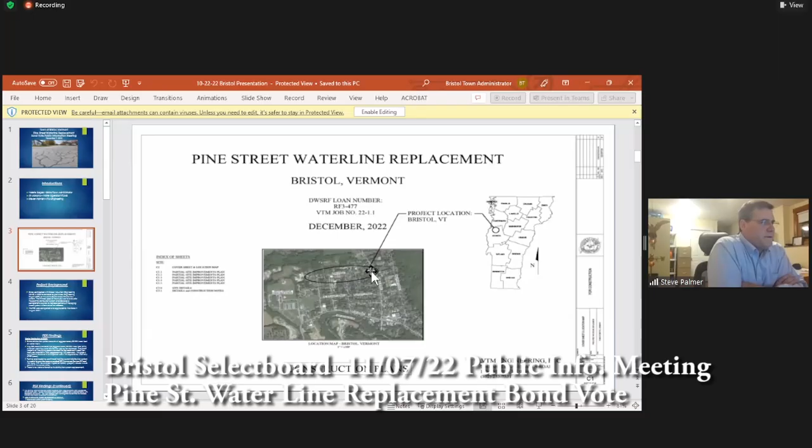GME did the preliminary engineering report. It was a pretty in-depth report, one of those things you definitely want to read at night just before bed, but there's a lot of good information in there. It didn't just cover Pine Street, it covered your entire distribution system. It was really a plan for you folks as a town on what needed to be done in terms of infrastructure maintenance and how you're going to get there. So for folks that are interested in that kind of stuff, it's really a good thing to understand.

So the basic findings out of this, as we were talking about, you've got a little over 10 miles of line here. Green Mountain Engineering recommended that you replace about 33,000 lineal feet. The great majority of that, 95%, is stuff that was put in 1905. There were a couple of small pieces added that were a little bit newer, but they were primarily for upsizing. The existing line is too small, and in the hydraulic analysis, they did a computer model to try to make sure we could achieve the desired fire flows everywhere. So there were a couple of small sections of line that they suggested, based on the computer modeling, to upsize from what's there today. The lines we're talking about replacing in the next 7 or 8 or 10 years are all 1905 lines. That really was the priority.

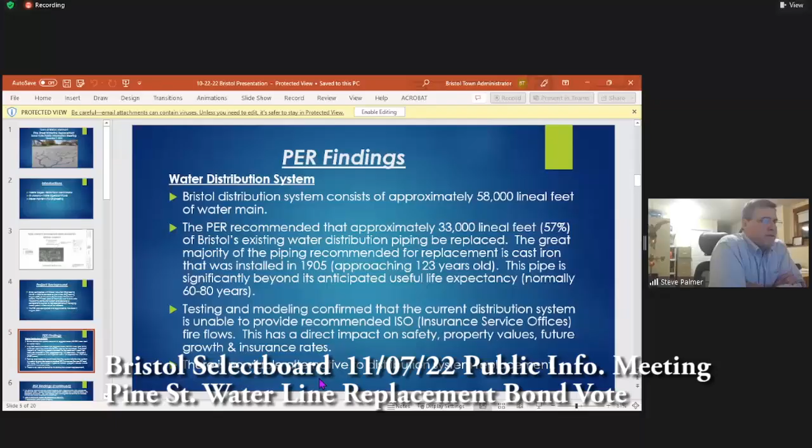This is a really important point. You got to realize in 1905 when they put this in, this was state of the art. This was put in with what we call bell joints - you've all seen it, one pipe slips inside the other. You've got a bell end on the pipe, and the other one's just a little bit larger, and it slips inside. Back then, they didn't have great materials like we have today with rubber gaskets and things that last hundreds of years. They would pack in basically straw, called oakum. They'd put the two pipes together, pack straw in that annular space, and then pour lead in between to seal it. That's essentially the sealer. And you can imagine, over the course of - we're getting up toward 120 years now - a lot of those joints have probably cracked and moved, and you're seeing significant leakage within your system.

Jill can talk a little more about the leakage rates, but I think the last time we looked at this, we were at about 55% leakage rate. That basically means that's the difference between what you bill your users and what your master meter today says went through your system. So it's quite extensive. Normally, according to the American Water Works Association, the typical municipal system would be about 16% leakage rate. So you guys are pretty high, but that would be expected with this old of a system.

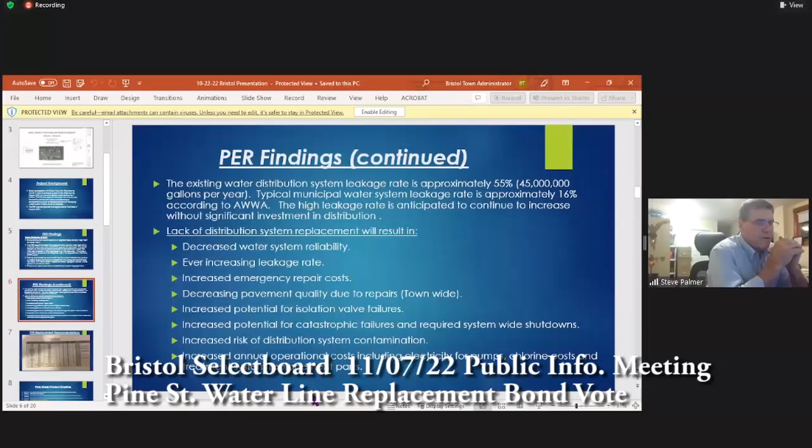That's where we're getting an increased potential for catastrophic failures. There's increased risk of distribution system contamination, increased annual operating costs, including electricity for pumps, chlorine, treatment system replacement parts. Everything's working a lot harder than it needs to.

Okay, next slide. Okay, Pine Street. So really, instead of going through each one of those, the bottom line is the project as proposed will be bid over the winter and constructed in the summer of 23, by the way.

Preliminary engineering report - here's a page out of Green Mountain Engineering's report. You can see all of the segments that they recommended replacing. Pine Street - Valerie's circling Pine Street. So those three segments of Pine Street are really what we're proposing today. It's about 2,600 feet of line.

Yeah, we kind of went through that already. Next slide, please. Okay, Jill, are you ready?

I am ready. So what you are looking at is a person that's going to have a heart attack. Just kidding. That is what the inside of a person's veins and arteries would look like if they were getting close to not having nearly enough blood flow, not enough oxygen, and they're going to have a heart attack. This is called tuberculation, and this is what is in the inside of these cast iron water mains - years and years and years of mineral buildup.

So now instead of having that whole 4 inches or 6 inches on all these 1905s, I think they're pretty much just 4 and 6 inch lines, we have maybe 2.5 inches, 3 inches in some spots, kind of a star-shaped pattern for the water to go through. So we don't have nearly the water flow that we would have. It starts constricting the ability to have the quantity of water going where you want for fire flows. And you can imagine valves that are seated into these water lines, sitting right in line, are going to fill up with the same material and not be able to go up and down anymore. So they're up and open, but when it's time to close them, you can't get a valve to seat its way down when the circle is no longer open.

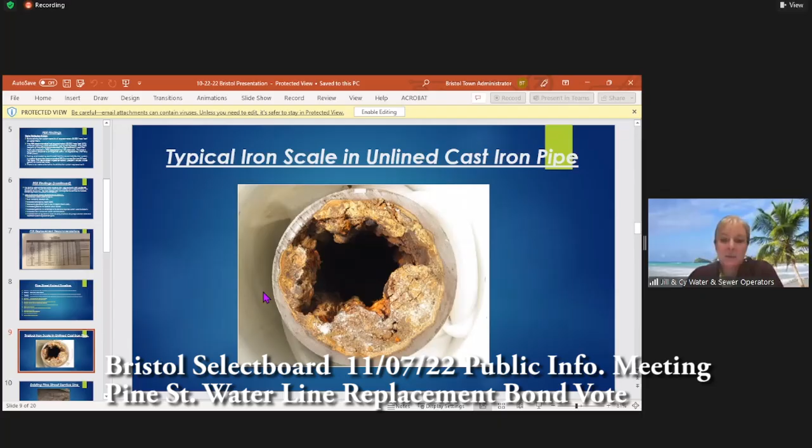So that is what we're dealing with, more than half of the system like this. I'm kind of excited to hear that it's 2,600 feet out of 33,000, because to me it's like, we're like 8 or 9%. So that's kind of exciting.

This is an existing, we call it a customer service, but a street service. Actually this is the town side, because that's the corporation - that's why they're calling it a street service line. That's the cast iron water main, right on Pine Street. And that is what it looks like when the water decides it's going to bust right through the service line just after the corporation. That leak right there, that size hole, will give you anywhere from like a 3 to a 5 gallon a minute leak.

Imagine if there's 100 of those in town. Take that times 1,440 minutes in a day, and that is why we are losing half the water that we're making - the joints, etc.

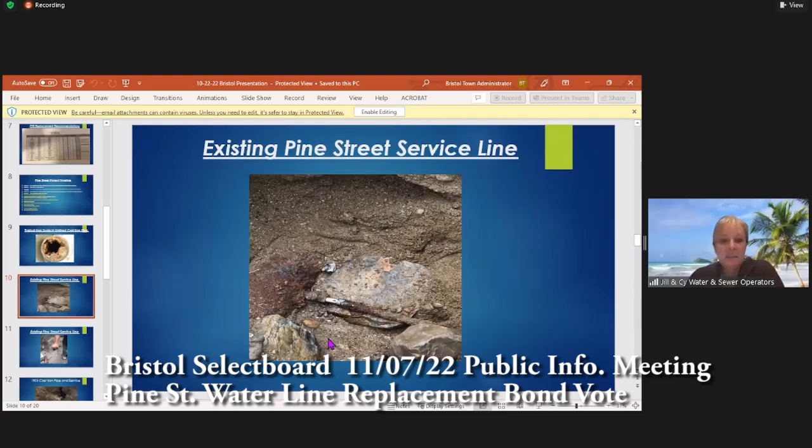Jill, that might be a good lead-in to talk about the service lines and the fact that we're at least going up to the curb stops with the replacement. That's awesome. Yeah, so under the road, we're at least going to the curbs. As far as what we call the customer side, leaving the curb, I believe that's still up to the individual customers. The nice thing is that while they're down there digging, at least the customers can see what they have.

And I can tell you, as the water operator, Cyrus and I are going to be paying attention to what we see and logging it down. So what that means to the average homeowner is basically what the town's going to replace is from that main water line under the street out to the edge of right of way and the side of their yard, if you will.

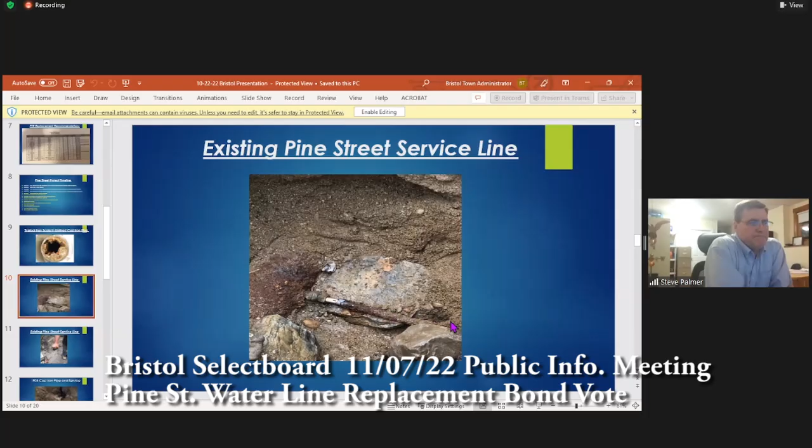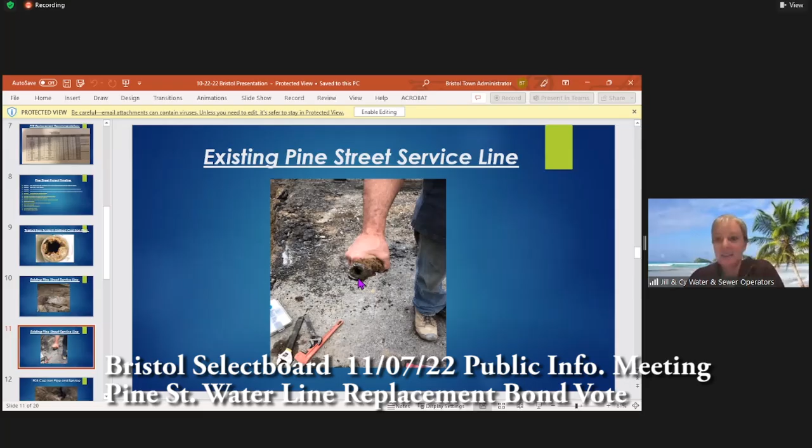Perfect, and that's just what it looks like. We're actually in the midst of replacing a customer service line today and tomorrow, and that is exactly what her service line looks like on West Pleasant Street. So that's what happens to those old iron service lines - they fill up with minerals and eventually just completely fall apart.

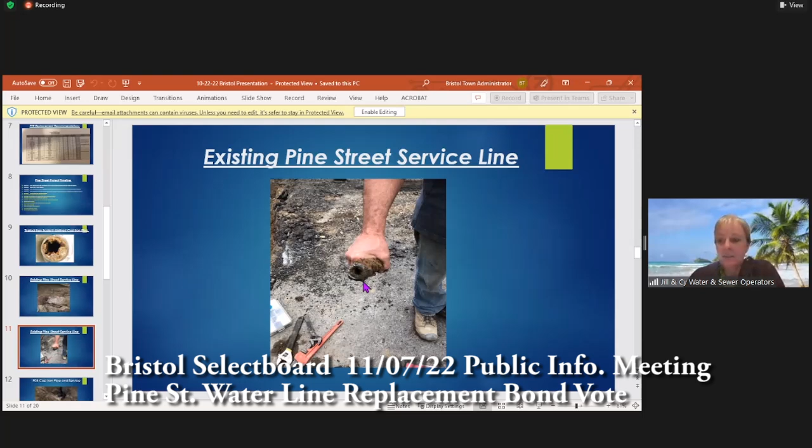That's a really pretty picture there, the cast iron pipe and where the joints come together. So the inside doesn't look too different than the outside. And this is a new water line being put into that old pipe.

Yep, because that was leaking pretty bad. That was busting up out of Pine Street on a Saturday when everybody was trying to bring their garbage down to the town garage.

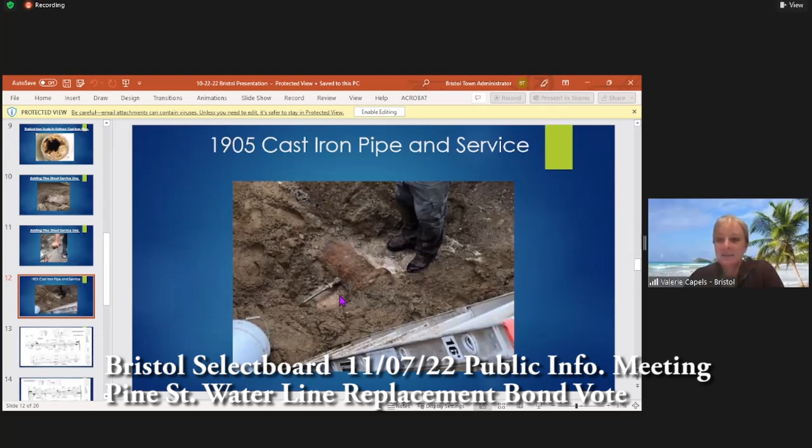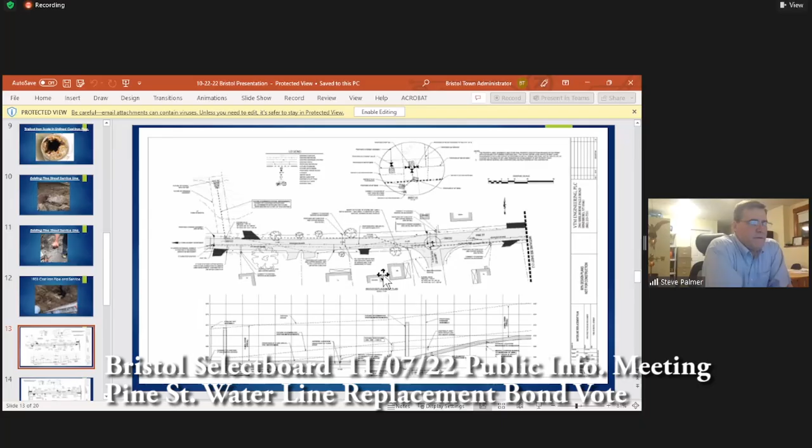I wasn't trying to show everyone every detail of the design drawings, just that the design drawings are done and they're here and available for folks. So if you want to see them, please contact Valerie and we can get those in your hands if you're concerned about what's going on in front of your house or property. We should have all of that information for you.

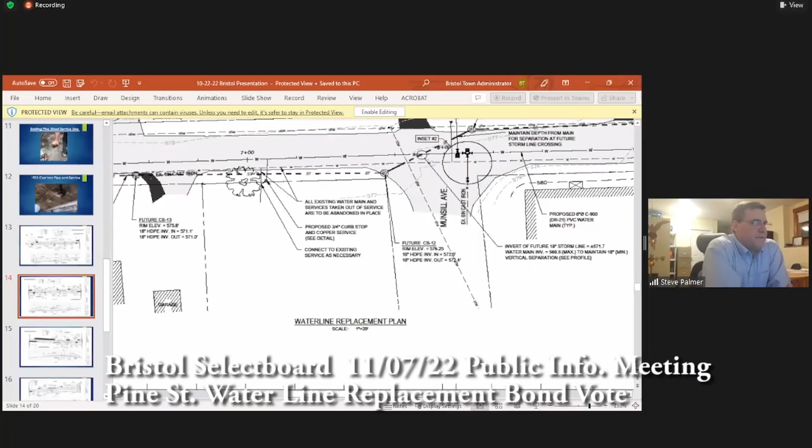Here's some more of the design drawings. You can see some good details in there. So that's a good point.

So what Jill was pointing out was the replacement - you can see right here, you're almost there Valerie, right in the middle where it says 700? Yep, see there's a small line to your right, keep going to your right a little bit, right there. Yep, that's what we're going to replace - the water main, plus that service line heading to each house.

As I understand it, Jill, maybe you can clarify this - the homeowner owns from the curb stop, which is a valve right about where you're at the edge of the property line, to their house. Is that correct in Bristol? Yep. So the town owns the curb, they own the curb box, they own the section that goes from the water main to that curb box. As that water line is leaving that curb valve, that water line belongs to the customer, and that goes from the curb into their home.

And then there's also a meter set, which is not part of this project. When you refer to the term curb, another term is curb stop, is that right? Yep, it's a curb stop valve. Some people call it the customer shut off. So there's lots of ways to describe it, but it's definitely the shut off between the town section and the customer section.

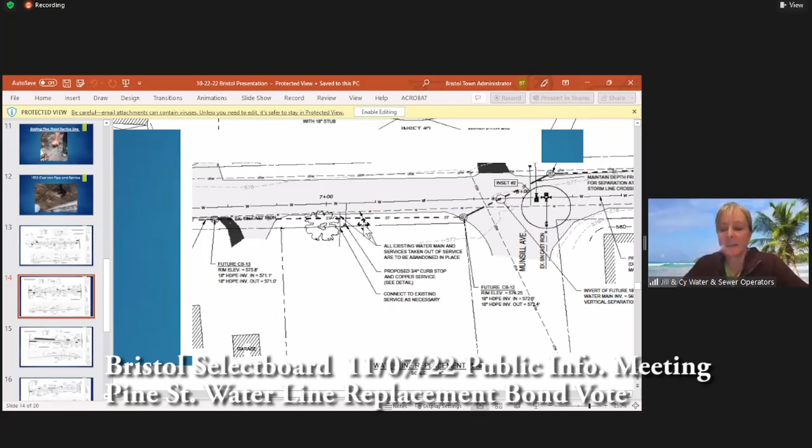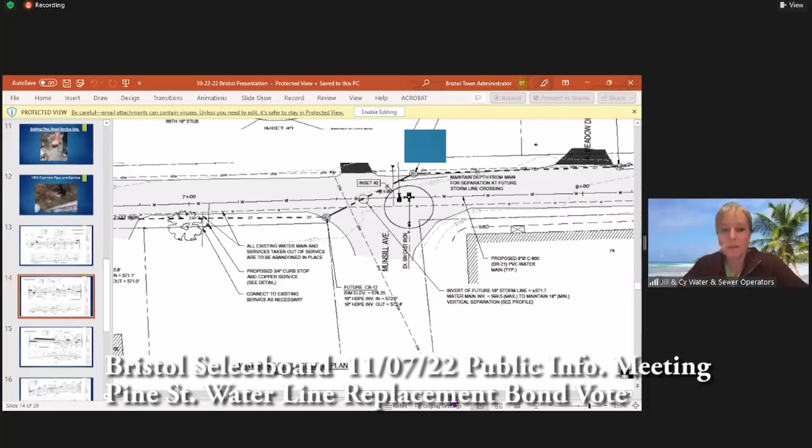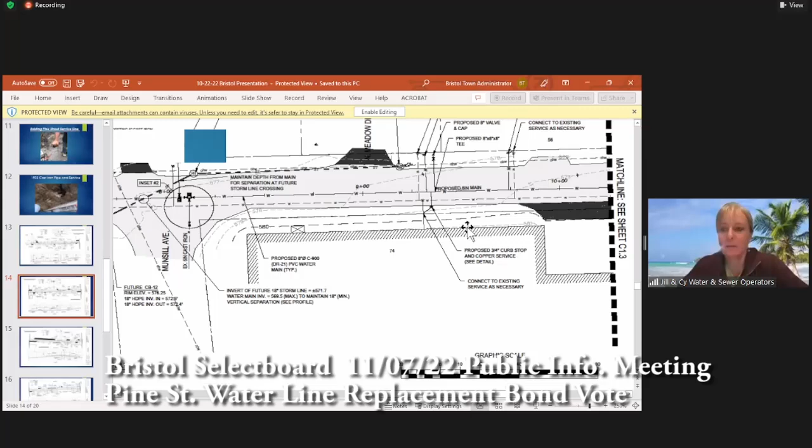It's like if somebody's valve inside their house failed, that's the curb you'd want to shut off so their house wouldn't flood. Or if you need to replace a meter or do any plumbing work where you didn't want that water line to be live. Most plumbers call us before they do work inside somebody's home because they don't want to count on that first valve coming into the house not failing. So they make sure that curb functions and shuts the water off before they break open any water lines inside the house.

Here's a view of the water lines going under the road to the other side of the street. The goal really was to replace everything within the right of way, to the extent possible, so in the future you folks can feel comfortable when you pave a road or do whatever - very low likelihood you're ever going to have to go back and dig that up.

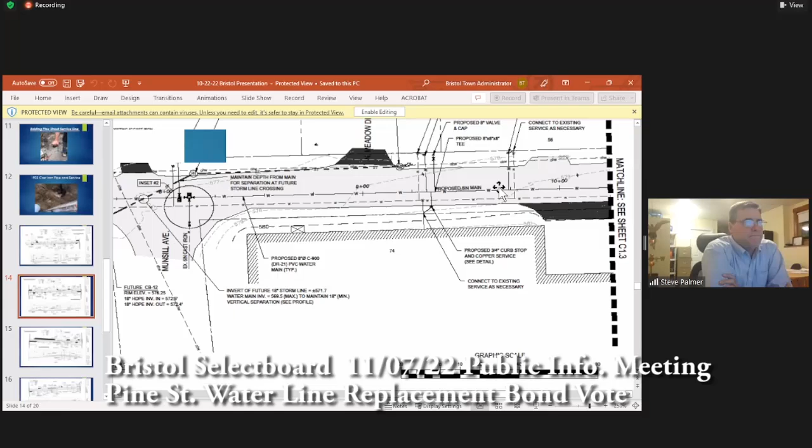It's just a little more of the same thing, but like I said, folks can go in and Valerie will have all of this stuff for you if you need it.

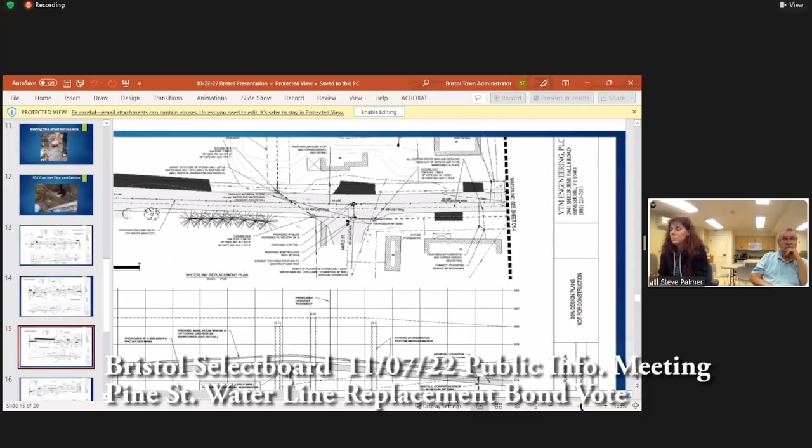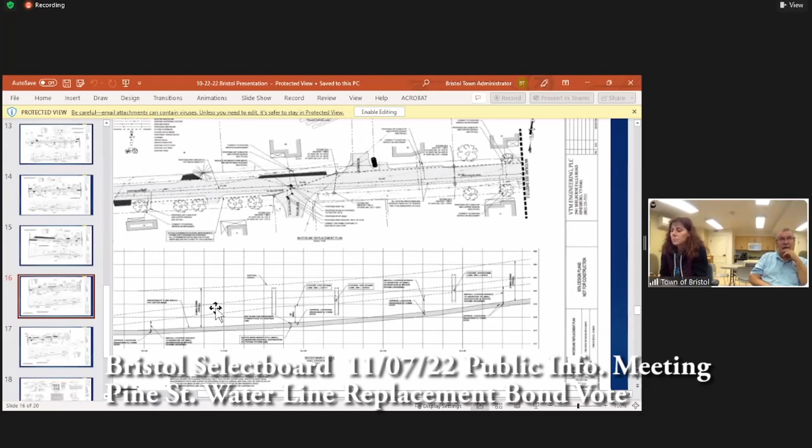Steve, with going across the road - whether the water line is on one side or the other, houses are on both sides, so you got to go under the road for water lines and the curb stops on the opposite side for that house. Correct, they're going to be protection for that water line.

Frost in the main road probably will go a little deeper because there's no snow coverage. Is there going to be protection for that, or will it go deeper? Minimum, everything will be placed at a minimum of 6 feet deep.

There are a couple of areas where, because of the design of the future stormwater line, we were a little bit shallower than that, and yes, we will insulate. I think there were some sections that were right around 5 feet, and we propose to insulate those wherever we don't have at least 6 feet of cover.

That's a good point. On these design plans, you can see the elevations of the line. So this shows the elevation of the line.

Darla posed a question. She says, if a homeowner wants to replace their line to their home, can it be done during this project when things are open? If not, how would they make arrangements to do that?

Excellent question. Good question, Darla. That's a good Jill question.

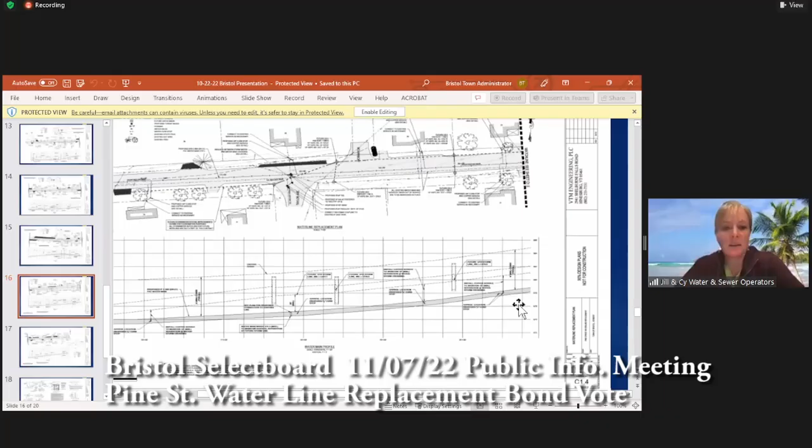So here's how we go about that. We get requests from customers very often that they've kind of gotten to the point where they believe it's time to replace their customer service line. We tell them the best thing they could do is go out and get bids from the local contractors, or a contractor of their choice, or a particular person, and that we can also bid that if they'd like us to. But it's whatever works for that person because they own it, and it's whatever they're comfortable with.

One important comment to make is that any work in the right of way requires approval from the town, the public works foreman, and maybe the select board, depending on the type of work.

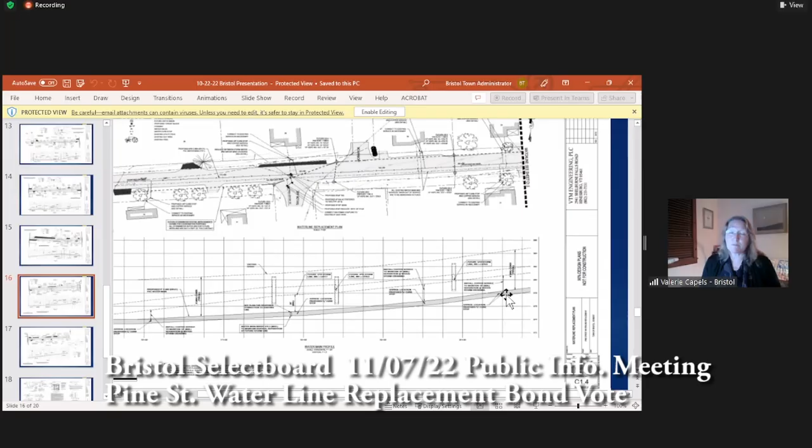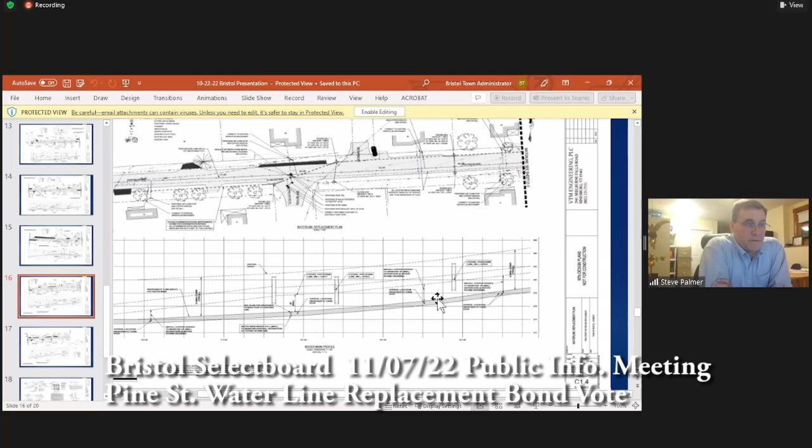Yeah, and like I said before, our goal with this project is to make sure that we get those curb stops pretty darn close to the edge of right of way, which is the edge of the property line of the individual. So you shouldn't have much work that the individual has to do inside of the right of way, at least as far as replacing their water line.

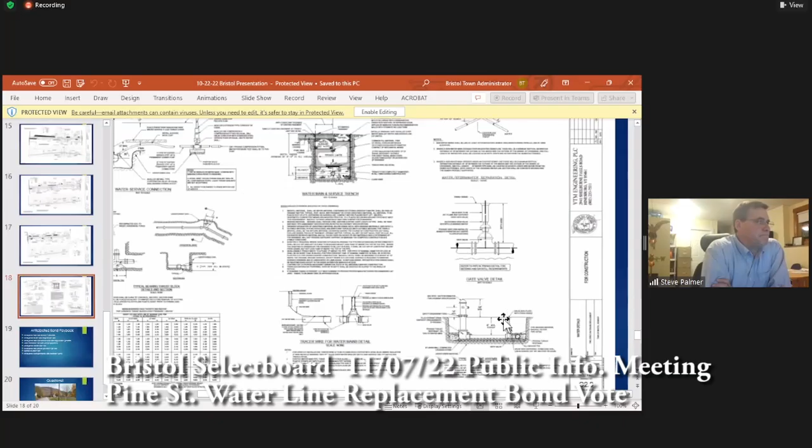Just some details. There was a question earlier about the insulation. There's an insulation detail right there.

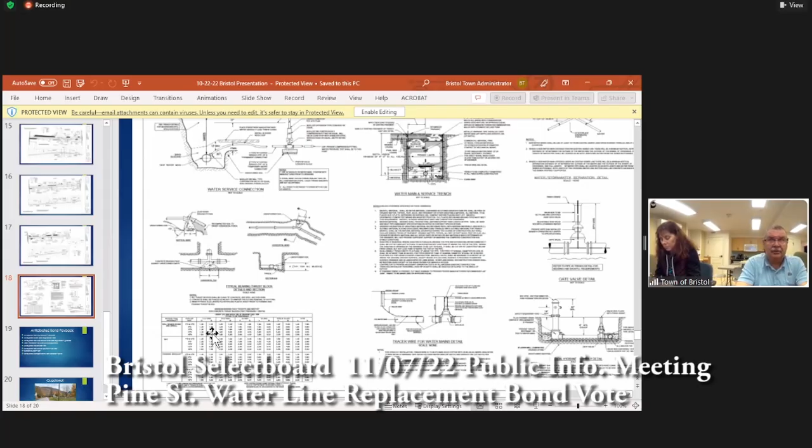Steve or Jill, as a board, I would hope that we would strongly encourage the homeowners who've got the old galvanized lines. I'm one of those homeowners on Pine Street that does have a copper line. I didn't buy that house 38 years ago until they replaced it with a copper line. But I think there's 30 plus houses or water connections on Pine Street. And if we had 28 or 30 of those that were still old galvanized and were potentially leakers, using your math, Jill, that's about 1.5 million gallons a year.

I would encourage this board strongly to encourage the homeowner, going by, to have it replaced all the way to your cellar, because if it's leaking from the curb stop to their cellar, they're still not paying for it until it gets to the meter. And it's still water that the town's going to pump that we're not getting paid for. So I would encourage trying to work with the homeowners on a payment plan while we're going by, to replace it all with copper, all the way to your meter in your basement. I would encourage the board, once we get closer, to strongly encourage homeowners to do that.

It would be great to get the oldest sections of the town water lines replaced, from distribution all the way through individual service lines, all the way to the houses.

So yeah, if there's a way to communicate that, and if the board decides that they want to provide a cushion by stating that they will work out payment plans, then I think you'll probably have more buy-in from a larger percentage of people that can't necessarily put a contractor's bill in any given week or month. They might need a couple months to pay for it, or they might need a year.

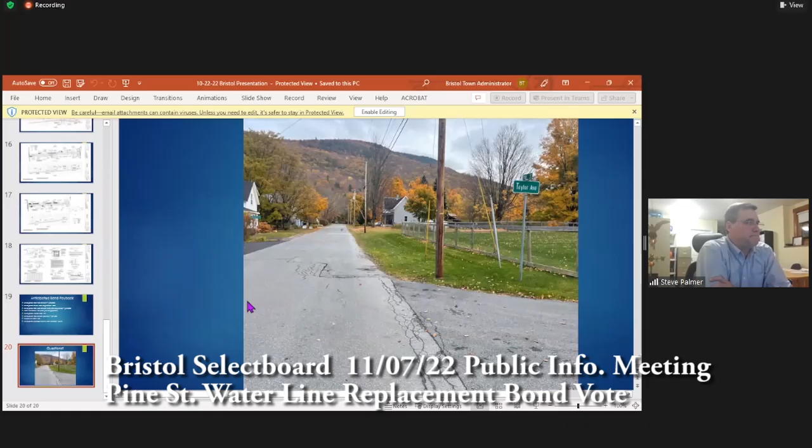Alright, I think that's our questions slide. I'm sure we can say, there we go. That's when we still had a few leaves left.

Any questions from the public or from board members or anyone else tuned in this evening? Pretty well, I've seen Jill and Cyrus there more than once as I travel down that street. There's a problem child there a number of times. And that water line does run in the eastbound lane headed towards North Street. Will the new water line go in the west, I guess the southbound or westbound lane?

Actually, if we can back up in slides a little bit, Valerie. So everybody will stay on water till the new one's in? Yes, everyone will, and the interruptions for folks will be minor when it happens, right? Each one will get transferred individually, but if you can back up in slides to number, let's start at maybe 15. Yeah, right there, oops, sorry, 13.

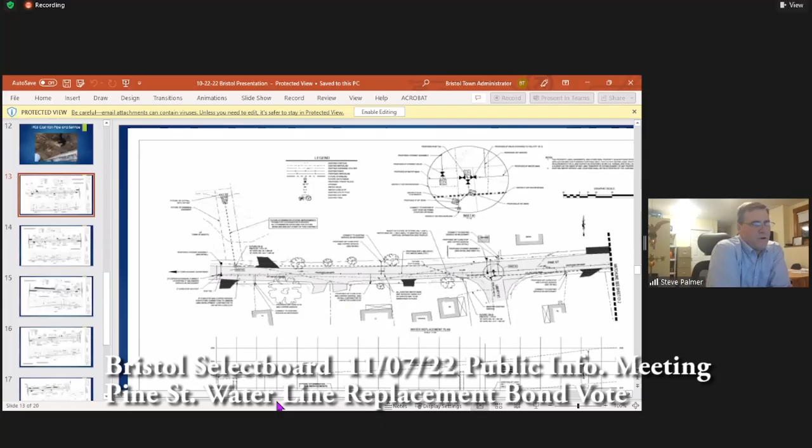There you go, okay. We don't show the center line of road here, but if you can zoom in a little bit, Valerie, please. Yeah, that's a little clearer. You can see the road is in gray, the street today. So more or less, we're staying more or less in the center of the road. Not exactly, but that's the goal. And we were trying to stay off from the existing water line to some degree. And that, you know, it's 120 years old, so that's the type of stuff, if you can breathe on it, you usually have problems.

And this dotted dash line here is the existing line. So we were also, the other conflict that we had was a stormwater line, and you can see in dashed, the future stormwater line. So we needed a minimum of 10-foot separation there. So we were kind of balancing a couple of things as we determined where to put that water line.

So Steve, when all is said and done, does the old water line get taken out? No, it gets abandoned in place. Oh, so you just leave it in there? Yeah, it would cost a fortune to pull that line out. Probably compacting that new water line will probably cause more leaks in the existing one. I'm hoping that any major breaks hold off until we get done.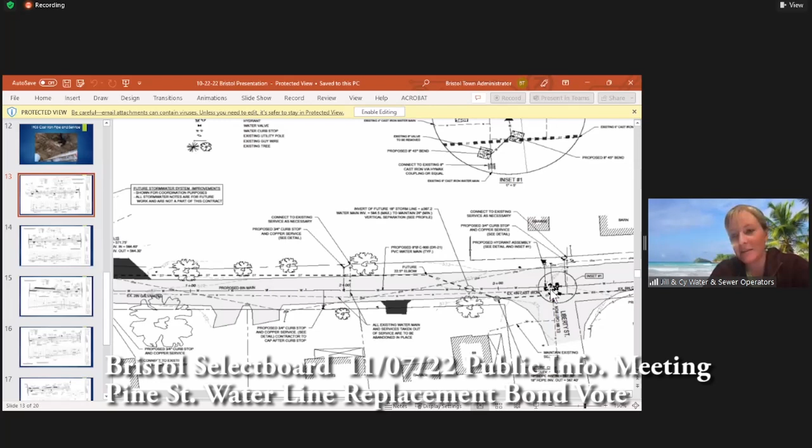He's not wrong. All they did was pave like a tiny little patch and it caused a water leak. It was just from the paver rolling on this. Eric was doing the best thing, just paving this horrible spot on the road, and the following day - those old joints are pretty brittle. Yeah, so it happened, I know.

You mentioned stormwater, is that this dash line here? Yes. And that is not part of the plan. It was originally hoped that we could integrate stormwater into this plan, but time was not on our side in order to move the water line plan forward and to get the funding in place.

We also talked about whether we'd be able to do them both at the same time. Will we be able to do them both at the same time though?

Possibly. At the last meeting we talked about the potential of combining the projects, but in the end I think we decided it would be best to have them separate, but they might be able to happen at the same time, as separate, completely unique projects.

Well, they would kind of have to be separate because the stormwater would be paid by the town, not by the water district. That was one of the reasons to keep them separate, but it wouldn't necessarily mean we'd have this disruption putting in the water line and then 5 years later have a major disruption putting in the stormwater. We'd try to combine them as best we could, if the potential was there.

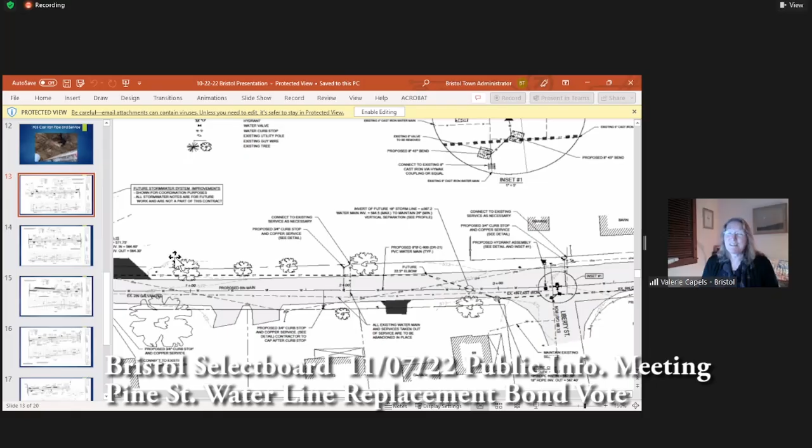I'm in the process still of scouring potential funding sources, but the challenge there is even if I find one that fits, the timing might not work.

I have on my agenda this week to get a hold of your road foreman. I had a couple things I had to get out today, and we're going to meet and see if we can find some ways in certain sections of that street to maybe do some other things that might be less expensive. Yeah, that would be good.

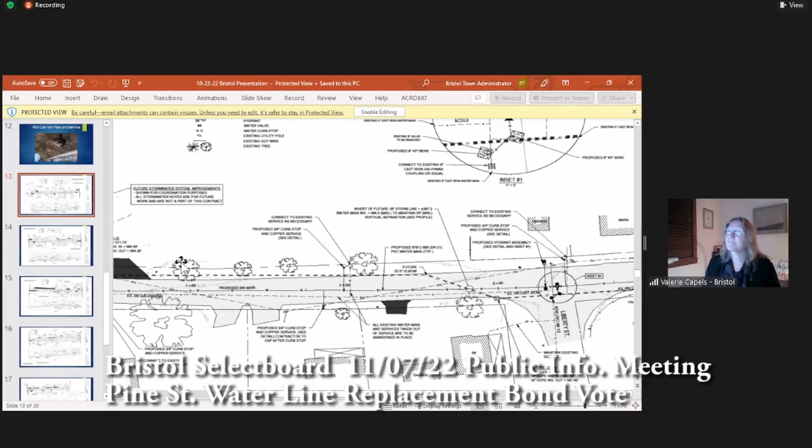Jill, what was the percentage of this compared to the entire town water system? You mentioned it previously, you were quite happy with this amount. He said we needed to replace 33,000, and you said this was 2,600. Oops, I did that backward. 8 or 9%, almost between 8 and 9, that's almost 10%.

Sweet. And Pine Street is the longest of the streets, so perhaps with our next venture, we can do 2 or 3 streets at a time in terms of a funding package.

Steve, we don't need to flip all the way back to the chart, but we had Liberty Street there, within the top 5. I remember I was out of high school and I haven't been out that long. Yes, you have. That street was done back in the late 70s, early 80s. And I wonder, I guess that's my question, what happened there.

Valerie, can you flip back to that? I will, and just so I don't make people seasick, I'll flip up and then turn it back on.

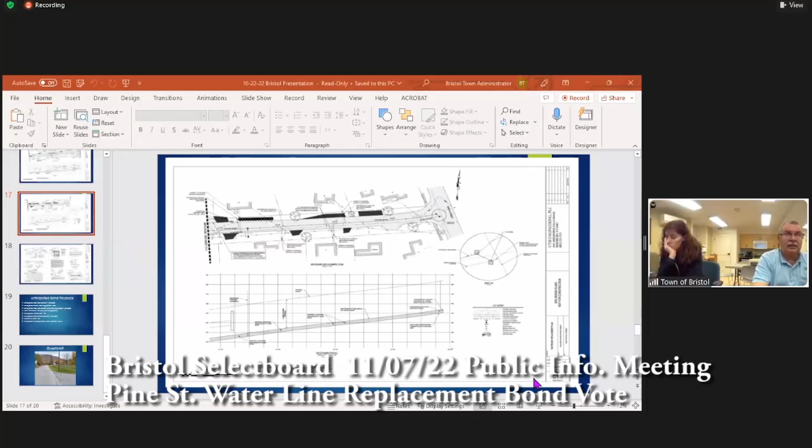No, that's correct, this has been a long time coming, obviously. And I don't know if we have an opportunity to look at the road width when we're looking at the stormwater. I don't know how much of the road we're dealing with there in the pavement. Obviously, if those two projects happen at the same time, we have an opportunity to fully pave the entire length of the road.

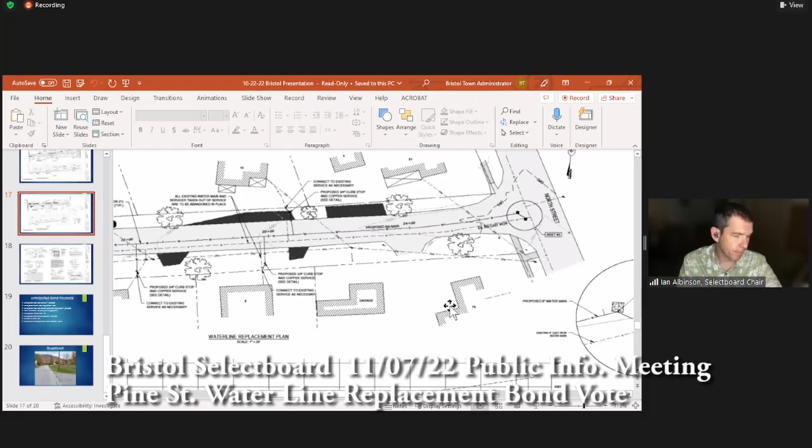But I don't know, again, with the stormwater, if we'd have an opportunity to look at the total road width to see what we could do in terms of cycling and pedestrian access. Unfortunately, I feel if you make the road wider, you're going to increase speed there, and that's something we're looking to try to curb. That's true. Yeah, no, you're right, that's absolutely right, Peter.

Looking at the speed studies done by the Regional Planning Commission, their study from a couple Octobers ago showed that speed on that street was actually below the posted speed limit. So it is a good candidate for a road to have the speed reduced to 25, which we're attempting, we're looking at doing. According to the regional planning study, the speed is fairly low. Obviously you're going to get people going fast down the street, but the majority of cars tracked were going below the speed limit. I think because of the width of that road, that's probably one of the reasons why that's happening.

Steve, I have a question about pervious and impervious area. If the road is widened, obviously it's going to increase the impervious area. Does that change the stormwater project from not needing any permits to needing permits because the impervious area is increasing? It'll depend on how much impervious area you have. The state's going to require a permit if there's anything over half an acre now.

So if you kept that below, whatever, 22,000 square feet, you wouldn't need a state permit. Does Bristol have their own stormwater ordinance?